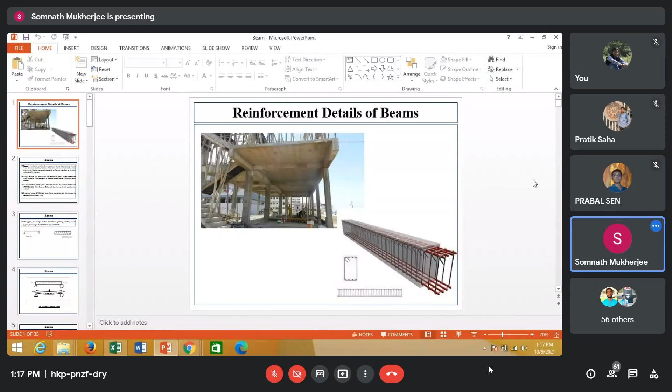You see what is meant by beam. Beam is basically a horizontal member, just like our hands are horizontal members. Our foot you can consider as a column, and hand you can consider as a horizontal member. We can take the load through our hand. Similarly, a beam takes the load from the slab directly, taking all kinds of loads from the slab. So the slab distributes the load to the beams. A beam is a horizontal member that carries the transverse external load, and that causes bending moment.

I do not know how many of you are accustomed with bending moments. It should be known to both lateral students and regular students—they should know what bending moment is.

Now when there is a structure and it is loaded, what happens? The internal materials of a structural component will undergo stress. There may be direct stress and there may be bending stress, because before failure it tries to deflect and bend. When it tries to bend, some kind of stress develops—that is called bending stress. Due to the bending stress, if you take the direct force, that force multiplied by some distance towards the support, that will give you the bending moment.

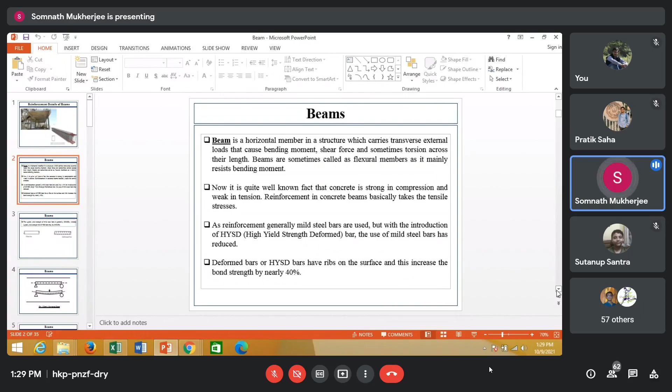HYSD steel is better for bonding. Bonding means actually the slipping surface between the concrete and the reinforcement. It should not be slipped away. The reinforcement should not slip away from the concrete, so there should be a proper bond between the concrete and reinforcement, so that no parts will be dislodged from one another.

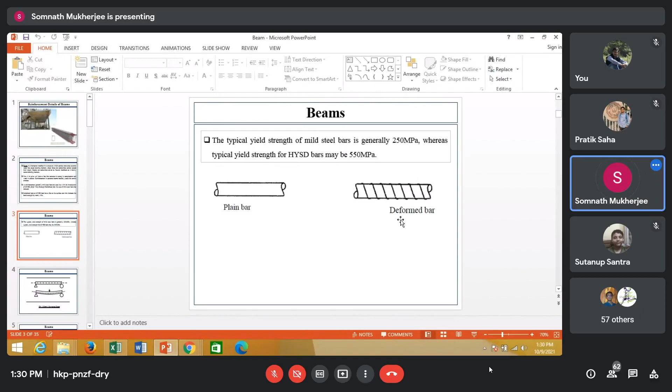So now this is actually the typical bars. On the left hand side you see plain bars, mild steel bars. Previously it was used much more, but nowadays it's not used. This is a deformed bar. Deformed bar means you will find some ribs at the top of the reinforcement.

Now this is a simply supported beam, very simply supported beam. Simply supported beam means the horizontal member is supported by two supports, maybe one end is hinge and another is a roller. It is known as simply supported. But no beams actually in real life are really simply supported beams. All are basically fixed supports or partial fixing supports, not actually simply supported beams. Simply supported beams are only for some temporary structures.

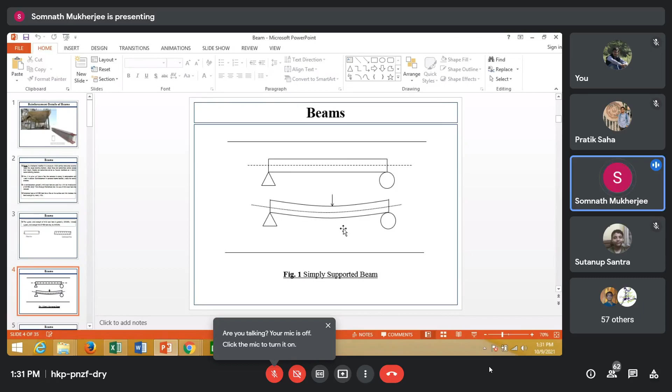Now you see, when the load is a point load, when the point load is given, the beam tries to bend. There is a bending tendency. At the middle, if it is a rectangular beam, the neutral axis is there. So at the neutral axis, there will be tension at the bottom, and naturally you have to provide the reinforcement bar at the bottom, and you have to calculate the position of the neutral axis. This will be covered in your structural and design classes, so since this is not the design class, I am just skipping it.

Now regarding the types of beam, it depends on the configuration. According to the shape, it can be rectangular, circular, or T shape. T shape means it is assumed that some slab portion at the top may be used as a T shape, or L shape. L shape will be at the corner end of the beam, and in the middle strip there will always be a T shape. You can consider this so that you can reduce the size.

But the problem is that when you draw the bending moment diagram, you will find that at the support, near the support, there is tension in the upper face, tension at the top of the structure. So at that face, the T-shape assumption will not hold good. So only the rectangular structure will have to be considered in the beam. That is why the beam section will be reduced, and you have to provide your reinforcement and size accordingly. Most importantly, near the support, the beam is liable to shear off.

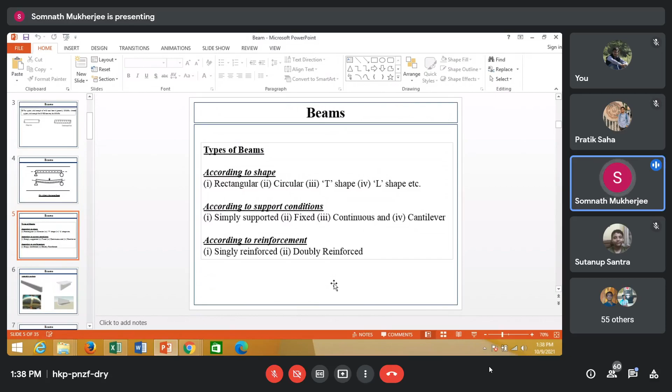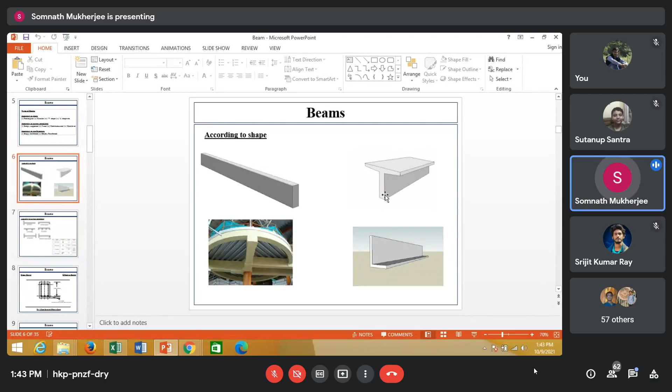That means the vertical structure is an integral portion of the beam, and this horizontal face will be inserted to either column, or mostly it is inserted to slab. And it is located at the side end. If you consider the side of your slab, the beam given at the corner, that is actually your L beam. It looks like L because the T portion cannot be managed at the top portion there. This can be discussed more later, just know this much for now.

Now, according to the support condition, I have told you about cantilever beams - there is a fixed support, maybe column, maybe beam, and slab to some extent, but mostly beam and column, and from there the beam is coming up, and that is cantilever. No support is there. Now there are some simply supported beams.

Already I have told that if the beams are supported on two supports, it is known as simply supported. Sometimes, in between there are two supports, and the beam is extended on both ends. When it is extended, it is known as overhang beam. It is hanging at the two ends.

It may be uniform, meaning on both sides the total length of the overhang portion may be the same, or it may not be the same. So unequal overhang may be there, or equal overhang may be there. That is also possible in this sort of beam, but normally we try to put the regular overhang beam, where on both sides the span length will be equal. That is another type of beam.

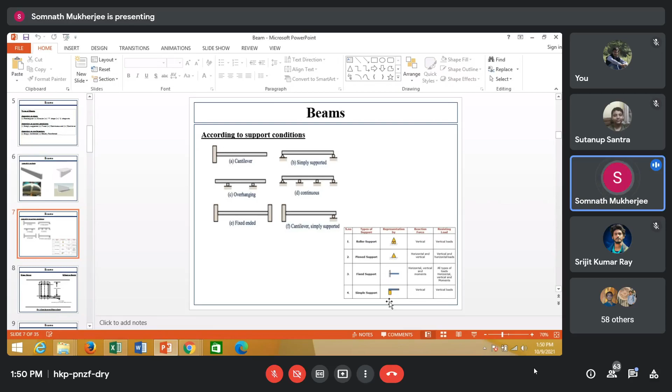So a pin-jointed structure will be shown like this, and for a fixed support you have to make this kind of support: a vertical line, and below and to the side of this vertical line you make some hatch marks. That is called fixed support. And there will be some simply supported beams, shown as a structure like this. Now you see, this is something about your beams.

In the single reinforced beam, the main reinforcement is in the bottom portion. If you take the CG of all the reinforcement, the center of gravity line of the bars, and between the center line and the top fiber, the top height of the concrete portion, the distance between these two is known as the effective depth.

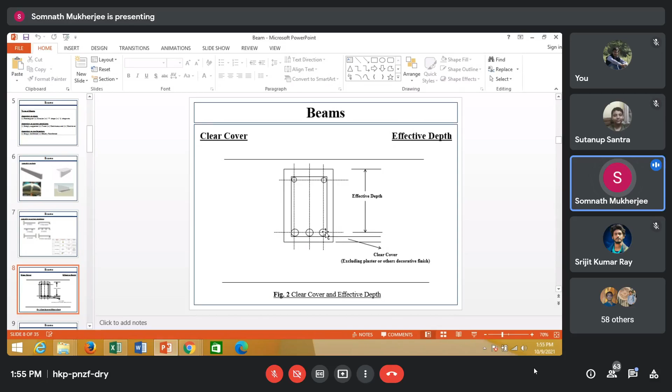In that case, you do not take the effective depth from the top portion of the concrete face; you have to take it from the CG of the top reinforcement and the bottom height of the reinforcement. So in that case, one bar height will be reduced in the case of a support region.

That will come. As I have told you, the reinforcement should be provided a cover, and the thickness of the cover, excluding the thickness of the plasters and others, should be adopted as follows. It is mentioned that clear cover should not be less than 1 inch, which is round about 25 millimeters.

But actually for slab reinforcement, you cannot provide 25 millimeter cover. Otherwise, if you consider clear cover of 25 millimeter, the effective depth of the slab portion will be reduced, and you'll have to put a much thicker slab. That will be uneconomical and not properly justified. So in the slab portion, your effective cover may be 15 to 19 millimeter, but for beam and column, you can have a minimum of 25 millimeter clear cover.

In case of a column, it should be more, not less than 40 millimeter. In case of a beam, it should not be less than 25 millimeter. In case of foundation, it should be 50 millimeter also. In case of foundation, where the soil is touching the main concrete members, you have to provide about 50 millimeter clear cover for the foundation portion, that means the foundation footing.

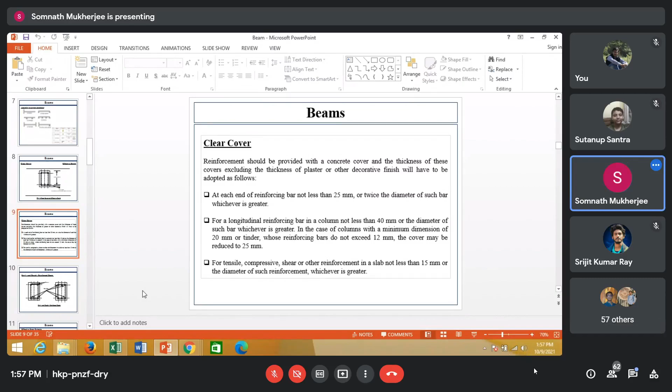Now, I have told you some time back about two different types of reinforced beams, that is singly reinforced beams and doubly reinforced beams. And I have also told you why doubly reinforced beams are needed.

Now when a restriction of the beam height is given, say your room height is 3 meter or 3.3 meter, and if you provide the rib of the beam, say 600 millimeter or 450 millimeter, then the headroom will be reduced. If you put your ceiling fan, then the fan may touch your head. So to avoid this situation, what do you do? Because the depth requirement for singly reinforced beams will be more, if you want to put the depth very high, you cannot get the headroom.

So from that point of view, you can make the singly reinforced beam take 50% of the total moment, and the rest of the moment will be taken by putting reinforcement bars at the top. So these bars, 3 bars at the top, 3 bars at the bottom, along with the concrete section, make a single unit that can take care of the total moment coming, and it can be solved.

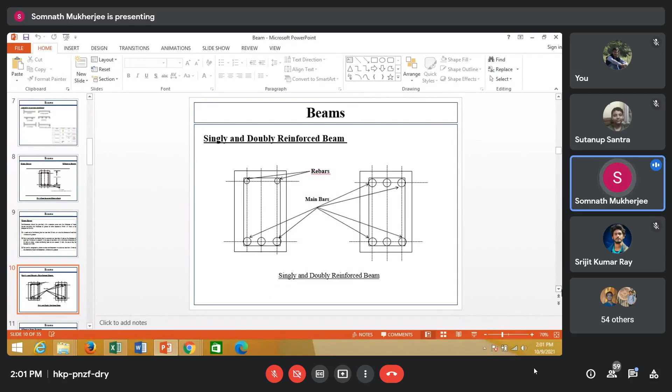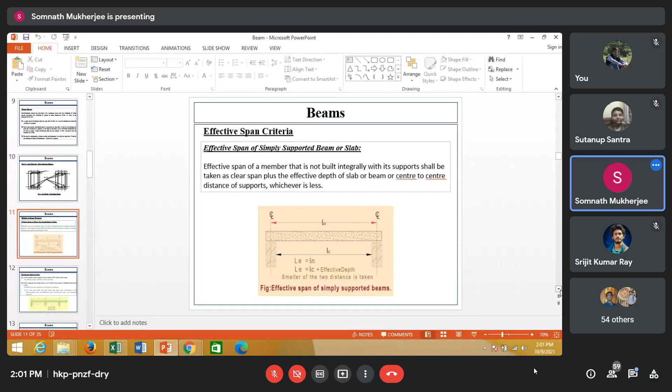Slab and beam both are more or less the same. Only thing is that in case of a beam, you have to consider only the width of the beam, and height of the beam is more. In case of a slab, you have to consider 1 meter width of the slab as a beam, and depth thickness will be much less. This is the basic difference between these two. Otherwise, the deflection checking and also the moment checking, reinforcement are all more or less theoretically the same procedure.

Now here you see L is actually the effective span of the beam or effective span of the slab in one direction, and this is the thickness shown in red color. The upper portion you can see is actually the depth of the slab, and along with there is a support here, and the beams are also inserted some portion within the slab.

It is known as monolithically connected. Monolithical connection means when the beam and slab are constructed integrally - that means at the same time, in the same way, when you are constructing the slab, the beam is also being constructed, in an integral way. Then it is known as monolithical construction.

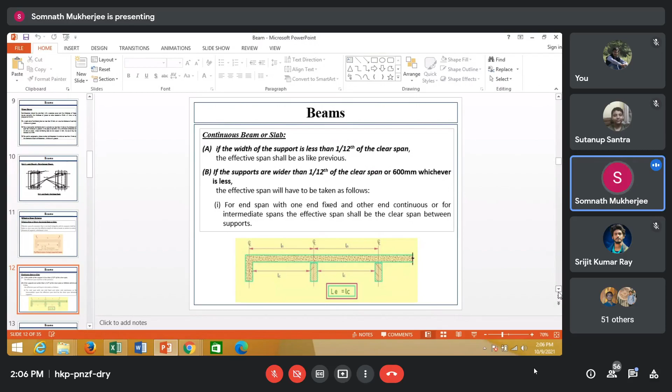If you are interested, I can take you to some real life site where construction is going on. Then you can see all these things and it will be clearer to you, how the things are being made. By giving lecture, it is not always possible to show everything.

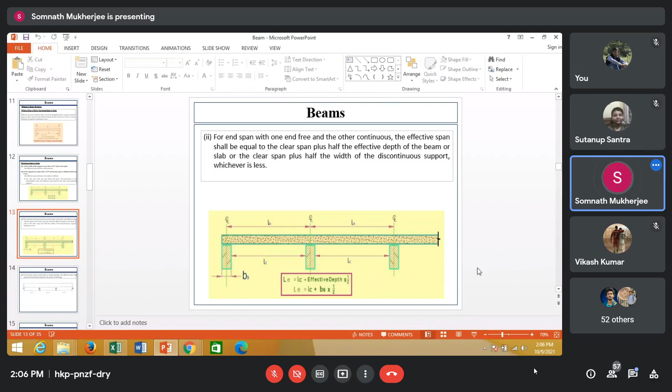So these are the beams, different types of beams. This portion is the overhang portion, the right hand side is an overhang portion. This is a cantilever portion, and all the others are nothing but an effective length continuous support. These are the different support portions only.

And you see on the right hand side, there is a chance of going down either on the right hand side or left hand side. So this is to be resisted. How can you give the proper resistance? By putting some fixity.

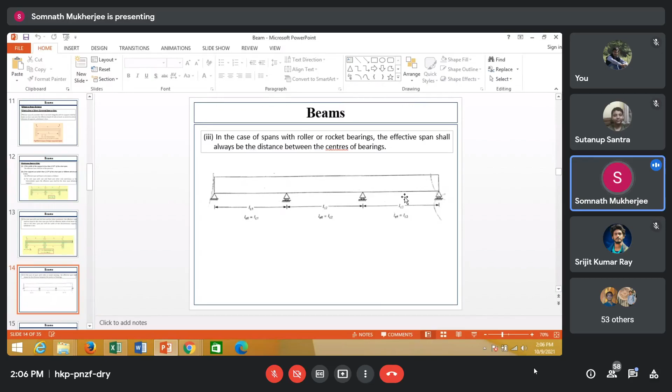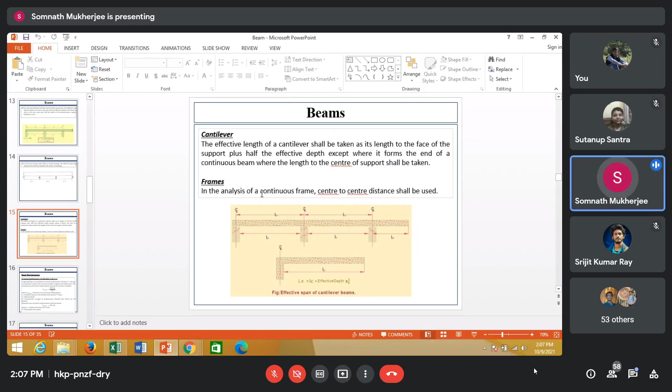So these are actually the frames, a combination of slab, beam, column, and finally the foundation. That is the frame, and center to center distance should be allowed. In case of a cantilever, only the overhang portion plus the center line from the face of the beam, that will be your effective span of the cantilever.

Now normally we provide ribbed reinforcement, that means HYSD bars, and normally it is denoted as Fe 415. Fe means the iron bar, and Fe 415, 500, 250 stands for the strength of the reinforcement in Newton per millimeter square, which is the SI unit. Previously it was kg per centimeter square; now it is used as Newton per millimeter square.

So for high yield SD bars normally it is 415 Newton per millimeter square. 500 can also be provided, but normally 415, and 250 also. Normally in our local area 250 is the standard strength of the rib bars, but if you take good company bars, then it can go up to 415.

Sometimes people believe that if we provide some more reinforcement, our building will be very strong, that if we provide some more rods in the slab or other portions, our structure will be stronger. But no, never. It will become over reinforcement.

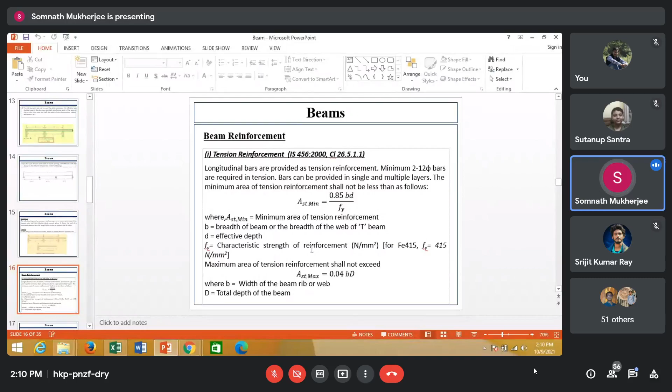And how much reinforcement can you put? 4% of the cross section of the beam. You should not take more than that. 4% at most you can go for, that is 4% of the total cross section area of the beam or any reinforcement member.

So everything is given, all kinds of reinforcement, how much reinforcement you can give, that is given in our code, the RCC code, reinforced cement concrete code for civil engineering discipline. It is given as IS 456, and it is revised after that. Whatever year is shown is the year of publication or revision. The code is sometimes revised year to year. When I was a student, it was IS 456 1964.

Then when I was just about to pass, it became IS 456 1978, and then I worked with IS 456 2000. And when I became a teacher, I am using IS 2000. But more or less it is the same thing, only some portions have been revised from the previous version.

So we can take this, and there are some clauses in between, some articles, some sections. These sections are known as clauses. So clause number 26.5.1.1 gives you how much reinforcement you can provide in a beam.

Everything given is a detail, and you have to follow it. Shear reinforcement is a vertical stirrup. By putting vertical stirrup, you can resist the shear force. Shear force acts diagonally in the beam member, mainly near the support. So naturally you have to resist it, and how much shear reinforcement can be provided is also given.

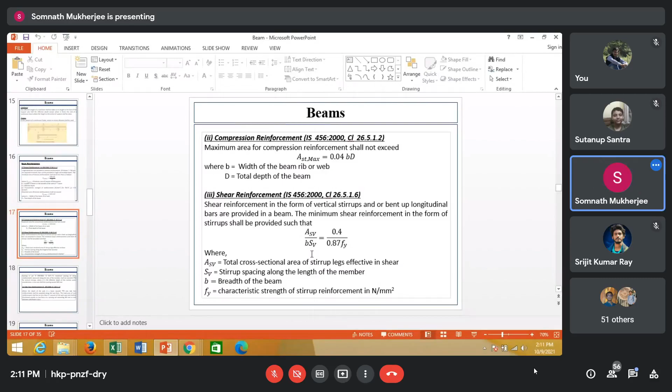But at this stage it is not required. You have to know how it has been drawn. Side face reinforcement.

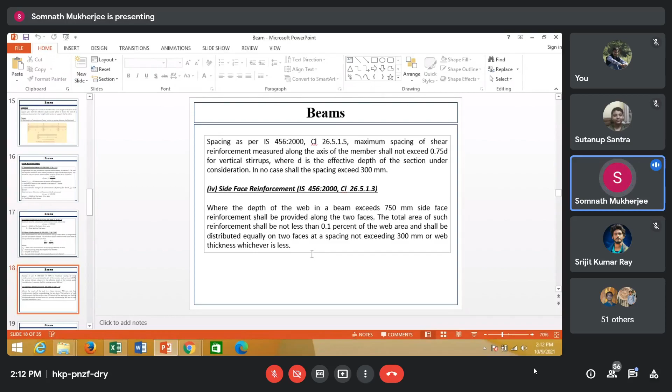Side face reinforcement is basically needed when the depth of the beam is much higher. In that case you have to provide side face reinforcement along the depth of the beam, some small area of reinforcement, in two equal faces. That will be 0.1% of the total area of the web. The distance between this reinforcement should be within 300, but normally we prescribe 250. I will show you after that.

You see, that is a typical drawing of a beam. This is the longitudinal section, considered as a single span. That means only one span, this may be fixed support or simply supported, but it is partially fixed or a fixed beam.

You see on top the red color reinforcement, that is the top bars, and the bottom is the bottom bars. We consider the bottom reinforcement as the tensile steel, the main bars, and the top bars are mainly meant for hanger bars, or given for holding the stirrups. All these vertical lines are known as shear reinforcement stirrups.

Now shear reinforcement should be spaced at certain distances. Normally we prescribe that in the middle portion, the span portion of the beam, the stirrup should be slightly more dispersed, the interval slightly more, because the shear force is not so high in the middle portion, but near the support the shear force will be maximum.

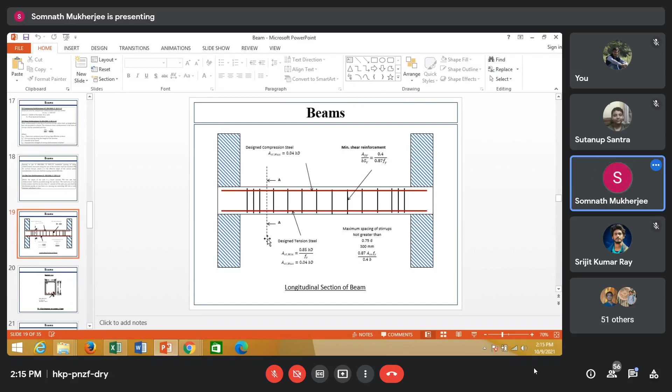There will be some section taken from the support, maybe L by 4, L by 3, and from that portion you have to start the closer spacing of the vertical stirrup. Vertical stirrup is meant for shear reinforcement. Otherwise the shear reinforcement will not be so close, it will be wider.

These reinforcements are sometimes known as nominal reinforcement, nominal stirrup. Nominal stirrup means you can straight away put it at a certain distance of JD. J is a coefficient factor, maybe 0.87, something like that, and D is the effective depth of the beam. So if you multiply 0.87 into D, effective depth, whatever distance comes, that type of spacing can be provided as nominal reinforcement.

The nominal and minimum reinforcement for shear should be like this: ASV divided by B into SV equal to 0.4 divided by 0.87 FY. FY is the stress value of the reinforcement, which is 415 Newton per millimeter square. That 0.4 divided by 0.87, multiplied by 100, will give the percentage of the minimum shear reinforcement.

And minimum shear reinforcement, if provided in terms of distance, gives the interval distance, also known as spacing. Maximum spacing of the stirrup should not be greater than 0.75 D. I told you 0.87 D, where 0.87 is J. If J is 0.87, then 0.87 into J, meaning another 0.8, it comes close to 0.7 or something like that. So instead of going to the J value, you can also take it as 0.75 D.

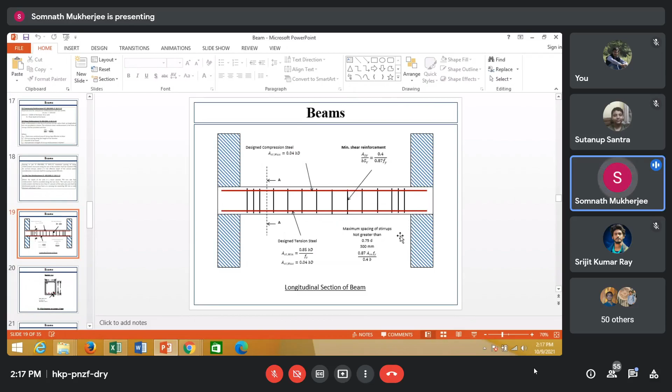Stirrups, or the vertical shear reinforcement, cannot be inserted into the supporting structure. It should be much closer near the support and much wider spaced in the middle span.

This is actually the main reinforcement, shown in red color, and this is held up with a stirrup. These are known as legs. This is called a single leg. Single leg means a stirrup will come here horizontally, then go up, and then it will be tied with another reinforcement bar, and held here, cut here. The whole reinforcement bar will be cut here.

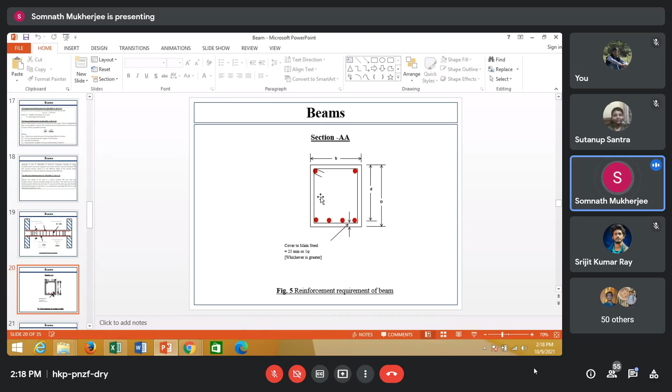When it is cut here and then totally inserted, it is known as a single legged stirrup provided in the beam. And it may be double leg. If you make another leg here, that will be a double leg, depending on the shear force and requirement. So this is actually the beam reinforcement.

It is tension here. It will be deflected, and bending moment will be there. So tension zone will be there at the bottom. That is why at the bottom we are providing reinforcement steel, reinforcement bars.

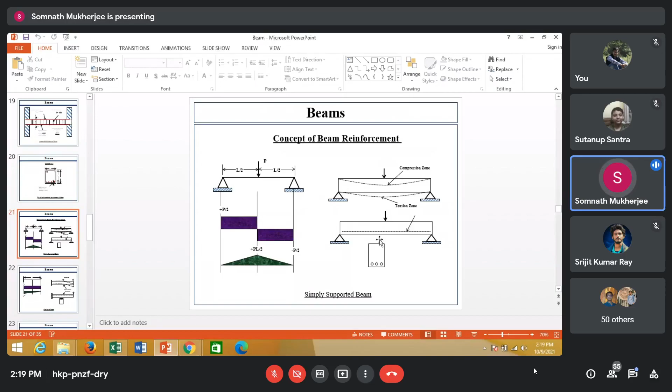If you take a direct common point load in the beam, then on the left hand side and right hand side there will be moment and shear force. The moment will be PL by 2, which will be the maximum moment at the center. If you take the shear force, then on the left hand side portion it will be P by 2. So accordingly you have to provide the shear reinforcement, and the maximum moment will be here, at this middle zone, where you have to provide the maximum reinforcement depending on your design.

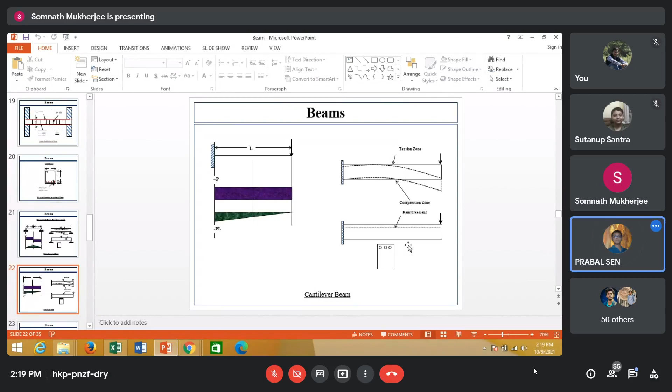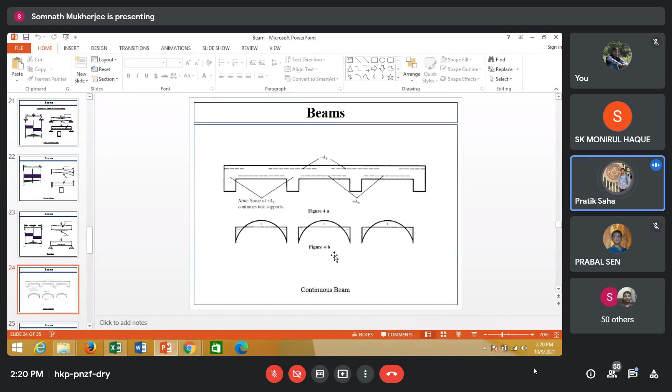We have a class after this, so it will be better if you stop after showing the video. I think I could not finish all the drawing. I do not know when I will show it again. I do not know whether you have understood whatever I have told. Yes sir, we have understood as much as you taught, but we also have the geology class.

Look at this, this is actually a beam, a continuous beam. You see these are the vertical bars, and these are inclined bars. These inclined bars are basically meant for shear reinforcement, and are nearer to the support. These are the supports, and near the support these inclined bars are there, meant for taking care of shear force, shear stress.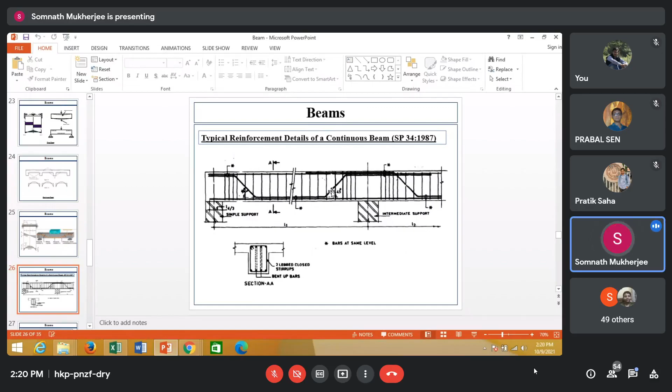Whatever shear stress develops due to the load coming into the beam, that will be taken care of by inclined bars. But nowadays, instead of inclined bars, it is provided as vertical stirrups only. So many things are there, if I get time I can tell you afterwards.

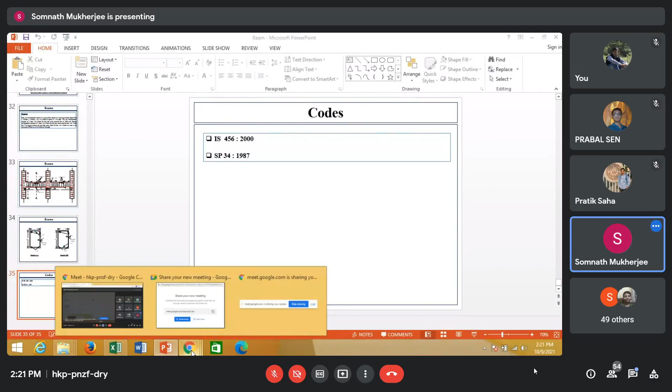I'm just now stopping my presentation. Now I would request Prabal to share the video, then I will show one or two figures, and then I will stop it for today. Sir, will you send us the PPT lecture? This is actually connected to this, Prabal will try to show some of the video which I have prepared.

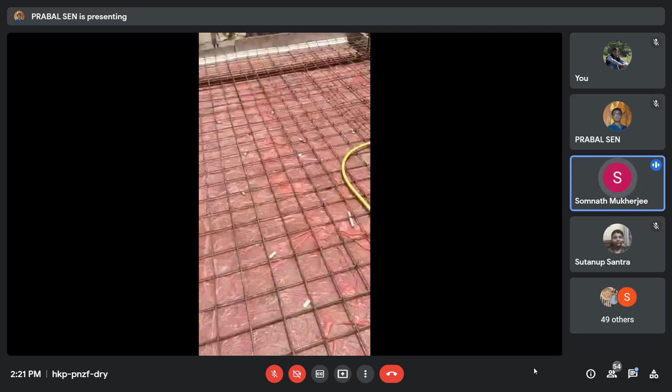I have taken this kind of drawings from a real life site. That will show only the slab portion, the slab reinforcement. Please turn up my voice a bit, that would be helpful. This is basically the reinforcement regarding your slab.

Now a slab is always designed on the basis of panels. You see here the reinforcement laid on top of the slab face. At the top face, reinforcement has been placed in a particular area, and you will find that all these rods are 8 to 10 millimeter diameter, and the slab is supported by 4 beams on 4 sides. This is the slab reinforcement.

This is slab reinforcement. The distance between the two reinforcements in a particular direction, say x direction, is round about 150 to 160 millimeter. On the other side, this is the longitudinal side, this is the transverse side.

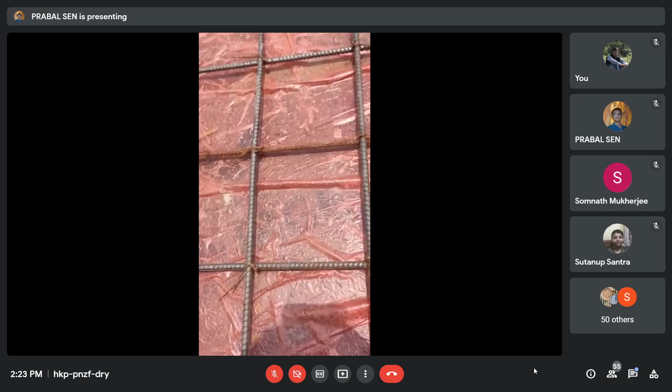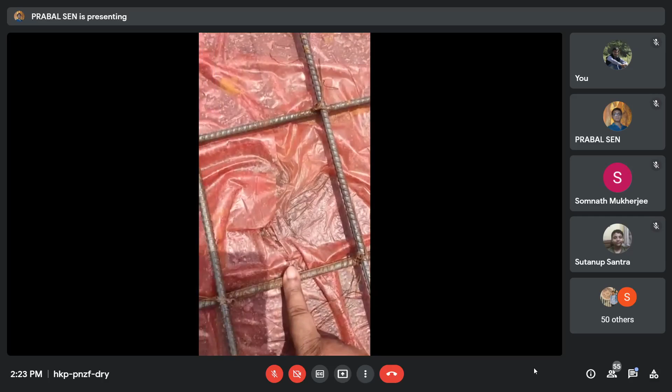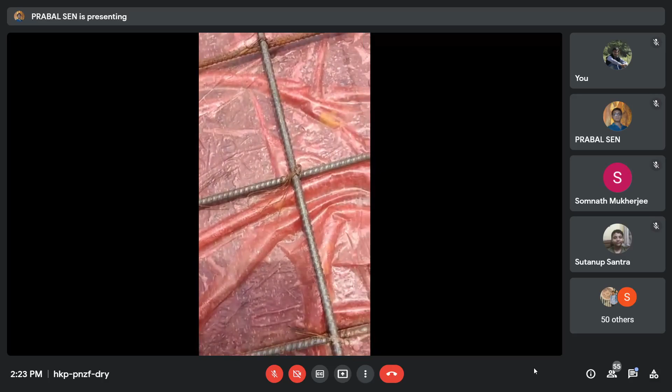The main reinforcement is given in the shorter span. My finger is on top of the reinforcement, this is the main reinforcement in the shorter direction. In the longer direction also there is a rod, which is also reinforcement, due to this being a two-way slab.

If LY by LX is less than or equal to 2, it is known as a two-way slab. If it is more than 2, it is known as a one-way slab. One-way slab means the slab spans in one direction only, so the main reinforcement will be only in that one direction.

Here you see main reinforcement has been given in two directions, so there are almost 4 layers.

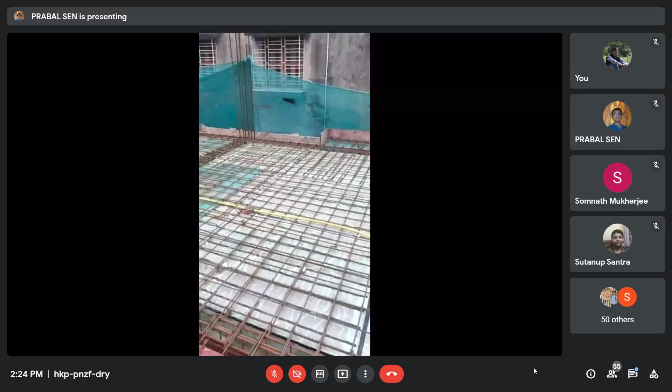There are so many spacers here. These are the spacers, about 10 to 15 millimeter depth. You see this is the spacer.

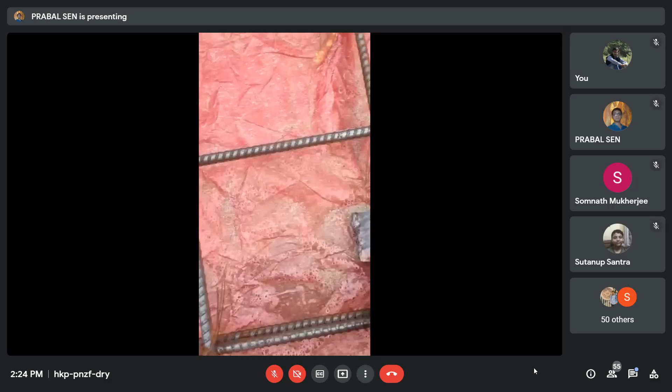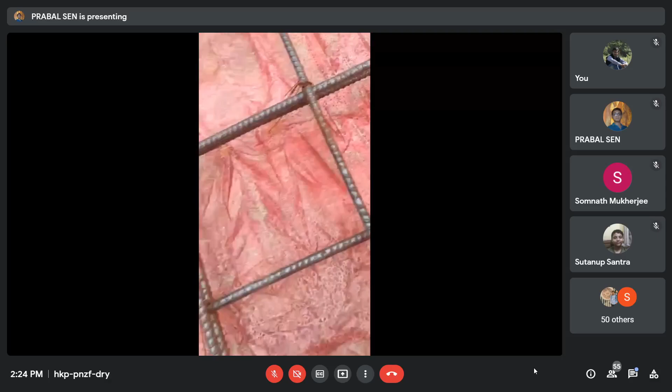This spacer is required just to place the reinforcement in its proper place, so that it should not get embedded with the bottom of the slab, and such spacers have been provided everywhere. Spacers for beams will be 20 to 25 millimeter, and for slab it is 15 to 20 millimeter. Sometimes it's given as 12 millimeter, about half inch, but normally it is 15 millimeter, and that spacer is very much required to keep the reinforcement in proper place.

Now you will find some electrical wiring pipes because of the concealed wiring. After construction is done, there will be no digging of plaster etc., so it should not be damaged. That is why before construction, normally the pipelines are laid, and through these pipelines the electric lines are inserted. This is the concealed wiring, for which the pipelines are already provided.

Now the main thing is this column reinforcement. This is the column, you see the vertical parts are there, and there will be some rings. At the bottom you will find some rings, these are known as tie bars. These are mainly 16 millimeter diameter for the column.

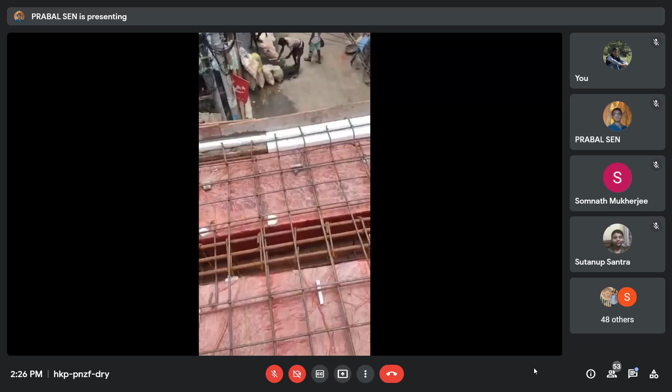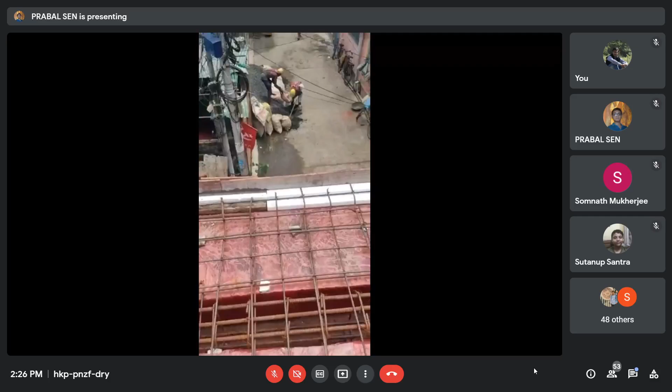In the cantilever slab, you see this is the cantilever slab. Here, only reinforcement will be given at the top side. So you will find that the reinforcement starts at almost 1/3 length or 1/4 length of the slab, and then it will go up.

You see here it will go up, the crank is there. Here you find some cranks. These cranks will straightaway go to the top, and it will lead to the last edge of the slab.

This is a cantilever, almost horizontal slab meant for the veranda area, and this cantilever slab will be provided followed by a beam here. You see beams are there. The beams are actually a horizontal member, it carries load from the slab, and then it will be distributed to the column.

You will find here the beams are connected to the column. This is the beam, this is the slab, cantilever slab, and this is the column. Beams are connected with the column, so the junction of this beam and column is very important.

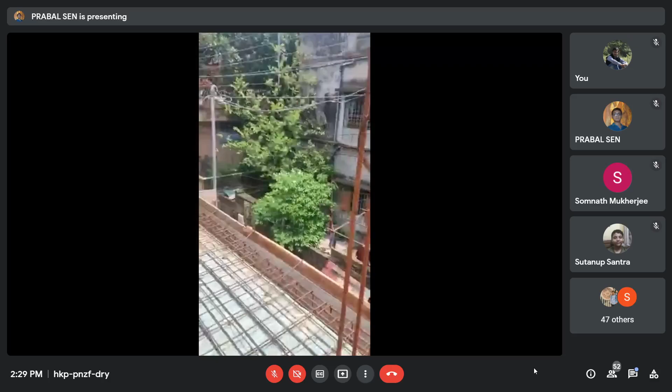150 millimeter, 100 millimeter spacing, horizontal dimension, interval between the two reinforcement is 150 millimeter, and on one side it is 150, on another side also similar. It depends on the design of the slab, but more or less in many places, if the design is not done properly, 150 is a very standard spacing. 150 to 200 millimeter center to center spacing is very common, and you can provide it without going for detailed calculation. But if you do a detailed calculation, whatever requirement is there, that requirement you have to provide. This is the arrangement I am showing, how the things are being arranged.

These are the reinforcement arrangements for beam, column and slab. Staircase, unfortunately I cannot show you, but I think whatever I have shown you is clear.

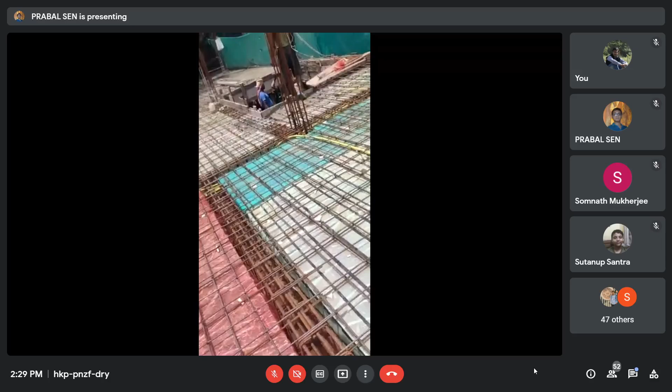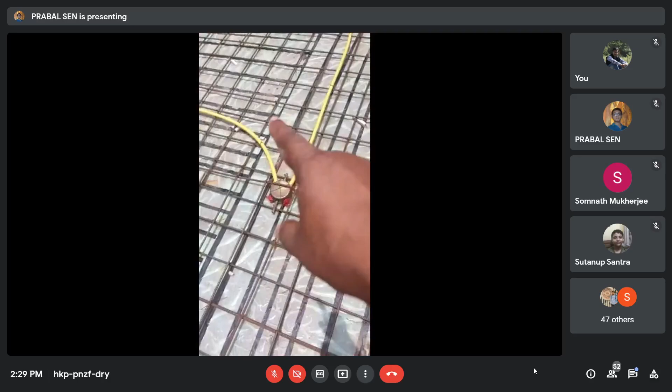Now in the slab reinforcement, what I want to say is there will be one span reinforcement. This portion is actually span reinforcement, the middle portion of the slab. So whatever reinforcement have been provided here, these are basically meant for the middle strip, that means the middle zone.

Middle zone is the span reinforcement, and in the beam portion, in the beam region, these are known as support reinforcement. The support reinforcement comes from two sides, and at the support, the moment occurs at the top. That is why most of the reinforcement have been provided such that the reinforcement goes at the top. So this is very important, reinforcement coming at the top. It starts from a certain quarter distance of the beam, or the quarter length of the slab, and from that portion it will start and go like this. So these are all top reinforcement.

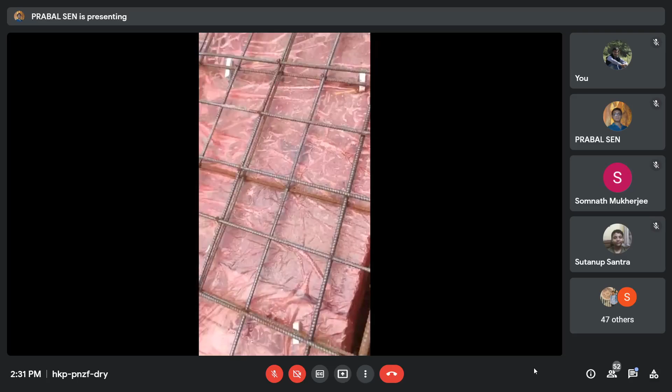You see, these are the top reinforcement. Bottom reinforcement is also there, but at least 50% must be in the bottom and 50% should be at the top. But here, whatever reinforcement have been given at the middle, that should be provided at the top, at this place, the beam place.

So this is the beam, and on my right hand side slab, this is the beam, and again on the left hand side slab, this portion is the middle portion, and this is the edge portion, or the support portion. Now in the support portion, rods have been provided at the top.

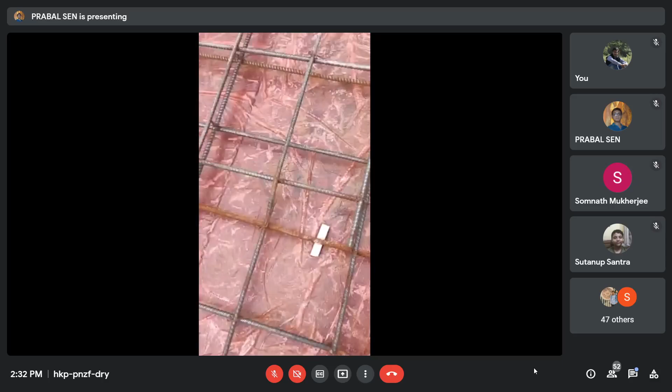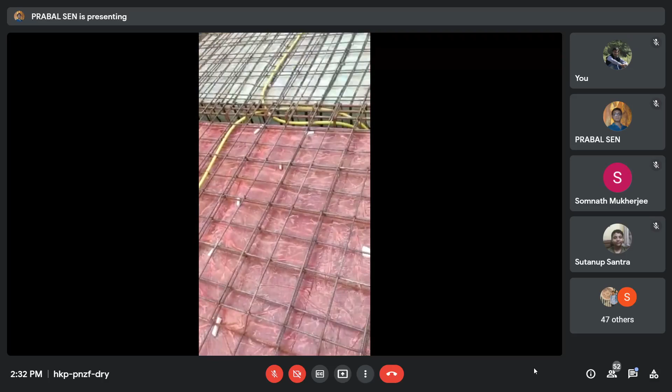There should not be any rod at the bottom, but sometimes some bottom reinforcement is also provided for various reasons. Sometimes some chairs are done just for binding the rod properly in the proper place. Sometimes you see extra rods that are not actually for reinforcement requirement. This rod is not for the reinforcement purpose, it is required for binding the rod at the proper position, to hold the other direction rod in position. So this is one kind of auxiliary or supporting reinforcement, required only for that.

Now I will show you the concreting for planing. After vibration, you see.

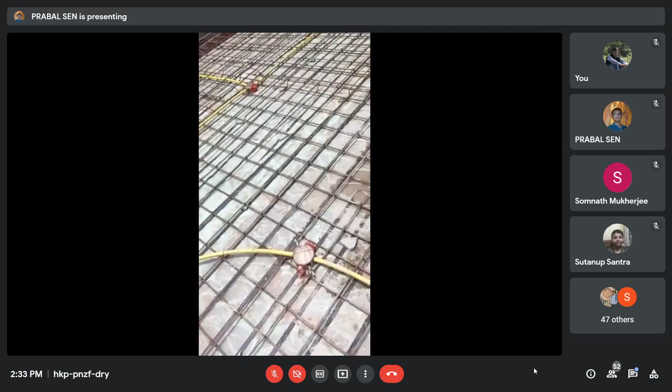Now you just see how the planing is done. See, this is called tamping action.

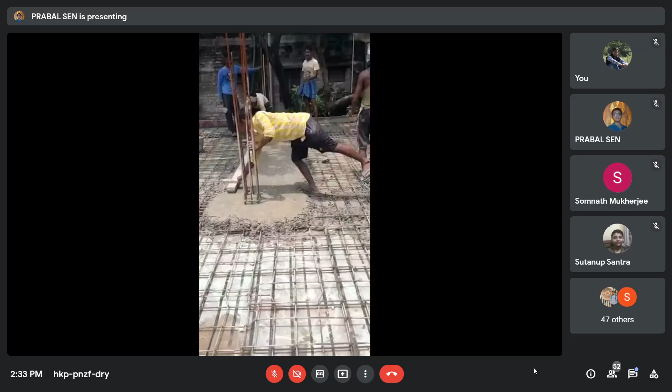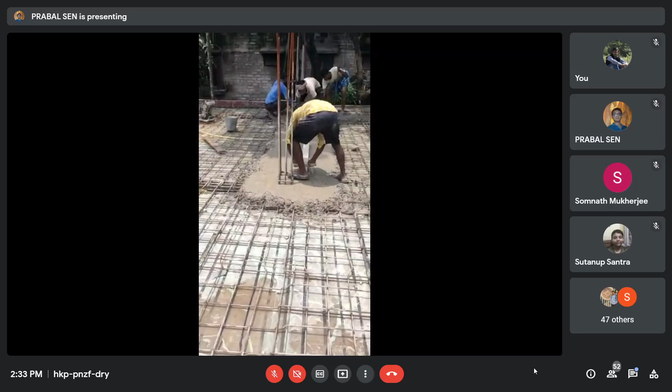You see tamping action. After vibration, it requires proper planing. So how is proper planing done? By means of this kind of planer, it is called a planer. In Bengali, it is known as pata.

So by doing this, the planing is done, and you see a lot of water coming up. This is called bleeding. This bleeding happens because all the moisture, all the water, comes up due to the voids, since concrete is a porous material with voids. So naturally, when you vibrate to some extent, all the water comes up at the top because the voids get compacted.

Compaction is very much necessary for any kind of concreting. So naturally, when compaction is done, pore volume is reduced, and water comes up because of the compressive action. That water must be cleared off, but without water, concrete cannot be made. It is required for proper bonding and gaining strength, so for the strength gaining purpose, water is mixed along with the other constituents. I think these things are more or less clear to you.

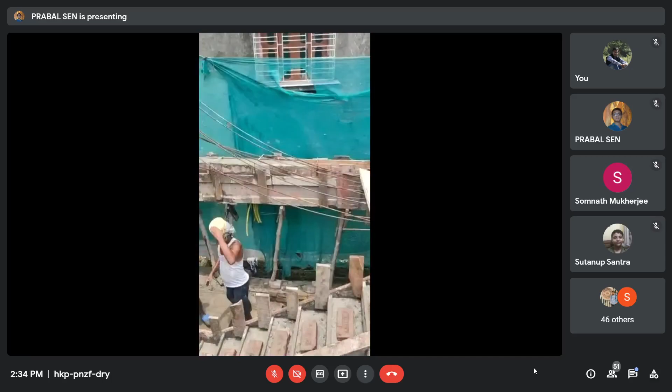Another reinforcement I'm just showing, that is staircase reinforcement. This has been given, this has been actually extended. Now these are the extensions, this is the staircase reinforcement.

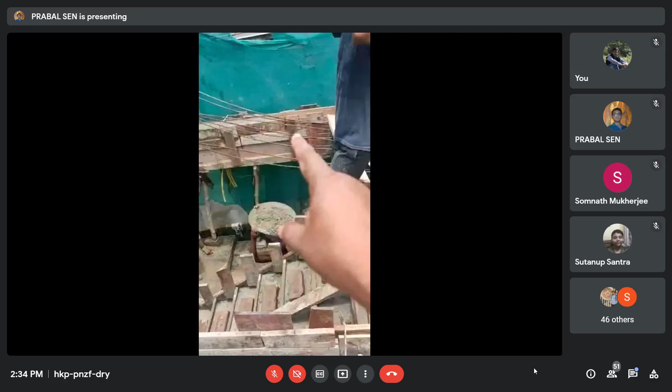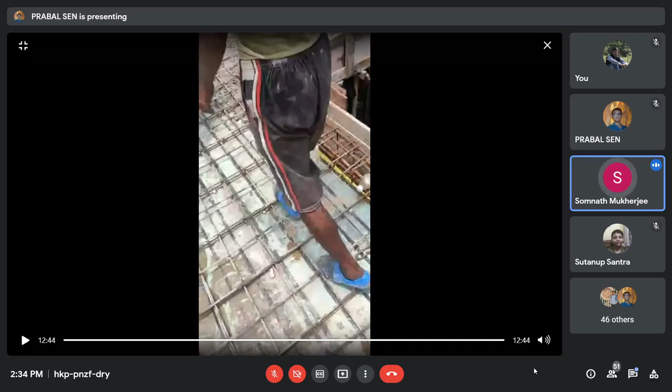Thank you very much, Prabal, for showing all these videos. I think it is clear to most of the students now, to some extent. I have shown the live video also - this is the live video, meaning you've taken the video and put it in the live form. So now I think it is clear how slab reinforcement is laid in two directions. If it is a two-way slab, meaning spanning in two directions, the load and moment will come in both ways.

In these cases, normally Ly by Lx would be less than or equal to 2. If it is more than 2, then the slab will be spanning in only one direction. The shorter direction will be critical for your slab design, and in the shorter direction your main reinforcement will be there. In the other direction, distribution bars will be there in case of a slab spanning in one direction.

And in case of a two-way spanning slab, reinforcement will be there in both directions. But in the shorter direction, the reinforcement will be placed first, and at the top of that layer, the longer direction rod will be provided. So that's all. Do you have any question right now?

Do you have any question? Sir, regarding the marble - there is some stone below the reinforcement.